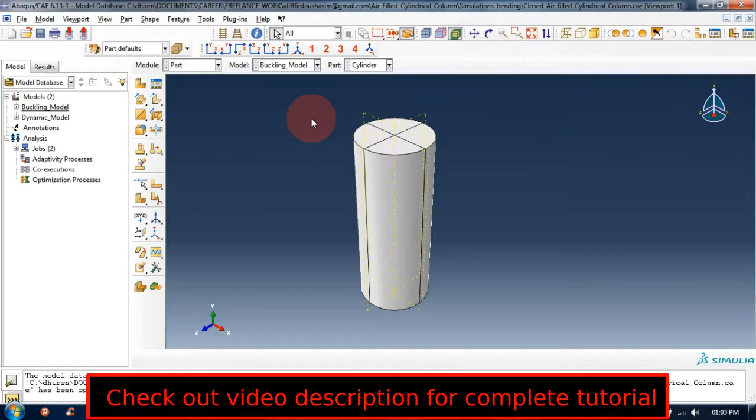In this video, I'm gonna explain how to perform bending of this cylinder, how to simulate the bending of this cylinder. In earlier videos, I have explained how to simulate the compression of this air-filled cylindrical column. In this video, I will be explaining how to bend this cylinder by applying a load parallel to this face, this top plate. Okay, let me demonstrate it very clearly.

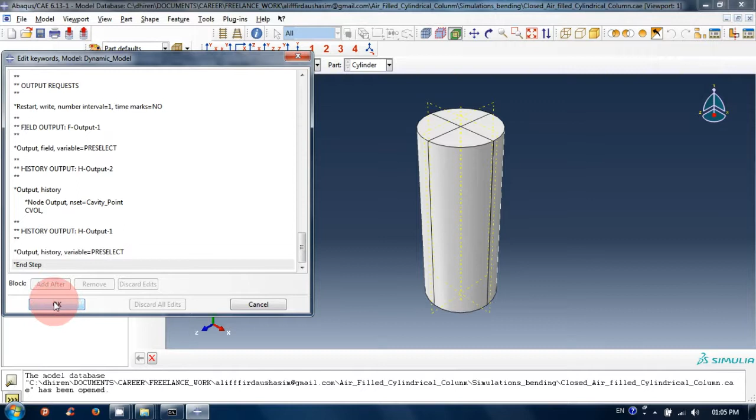Before that, let's clear which are not needed. I don't need this buckling model right now for this purpose. Right click on dynamic model, which I will be editing right now. Right click on that and edit keywords. Okay, click on discard all edits. Click OK. Edit keywords, and things are okay.

Okay, great. So now let's go to load module, create a load, deactivate this, or I can delete this. I don't need it right now. Let's delete that. Click on create and then select the step 1 if not selected already. Then select surface traction. I will be applying surface traction over the top face, so click on that, click on continue.

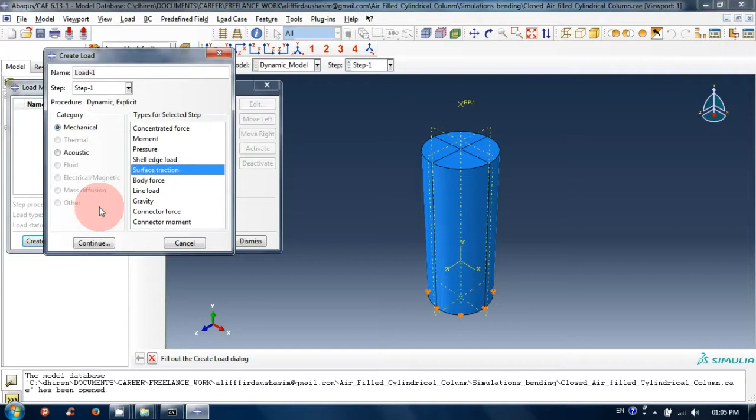Select the surface for the load. So let's select the top surface. I have selected that. Click on done, and then it is asking which side you want, brown or purple. I want the top outer side, so let's select brown. Now I want to apply general traction. Click on vector required.

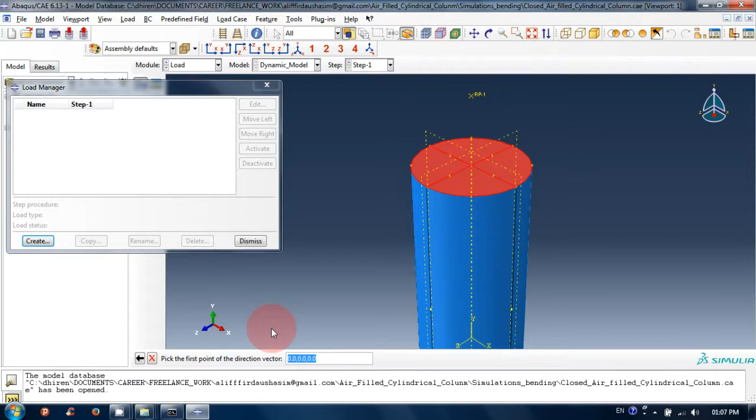It is asking basically the direction of the traction, so I will be applying that traction in the positive z direction. By specifying 2 points on that direction vector, it will clear the direction. This edge is along z direction. The first point I'm selecting this point, and the second point I'm selecting this point. So this is in z direction, 0 0 1, this is positive z direction.

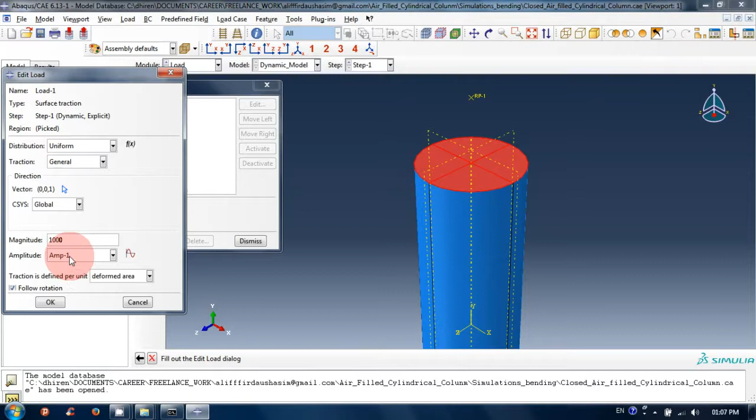Next is the magnitude. Give some magnitude, let's say 1000 Pascal. I'm using SI unit, so 1000 Pascal. I have earlier created amplitude, so this is amplitude. Click on OK. So see, now the direction of the traction is shown on the top face. It is in positive z direction.

Let's check certain things. Go to step manager and click on explicit. This is the step which we have created earlier, dynamic explicit analysis, and here is the amplitude manager which I have just selected in the load. You can edit it. I have given this type of amplitude. This is the time, and this is amplitude.

This is the load which I have given, that means 1000 Pascal. It will be multiplied by these factors. From 0 to 1 it will increase linearly, and then after, if I continue the analysis up to 3 seconds or 2 seconds, it will be constant. So it is up to your choice. Okay, so click on OK.

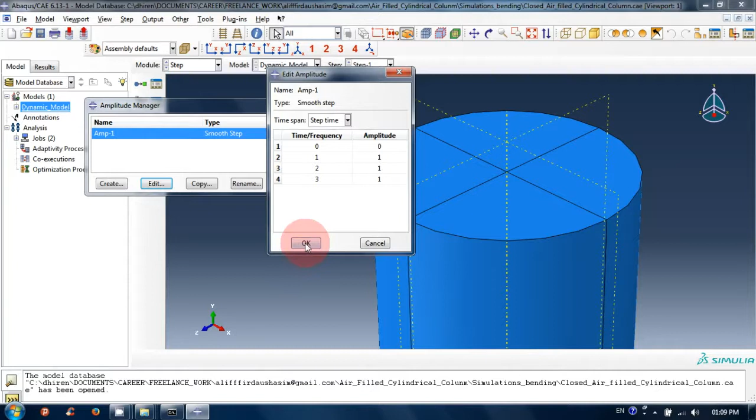Let's check interaction, which I have created earlier for fluid cavity. Okay, it's okay. Again, let's check in the load module predefined fields. I have created, I think, pressure. Yeah, it is fluid cavity pressure. Good. Let's give some temperature also.

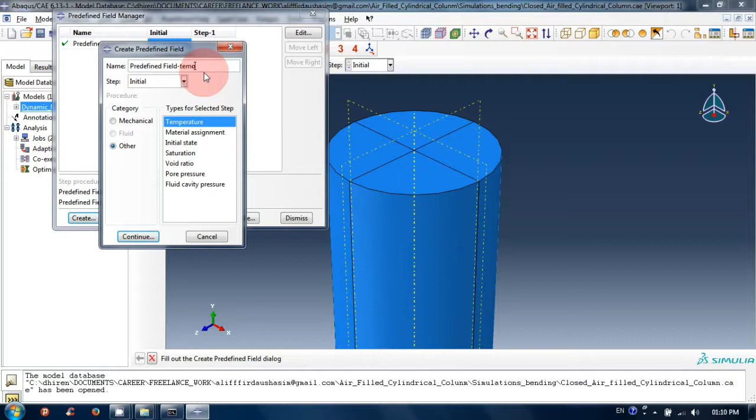Let's click on create, others, temperature, name it temp, so you can recognize what is what. Temperature. Select a region for the field. I have defined the fluid cavity using this point, so click on done.

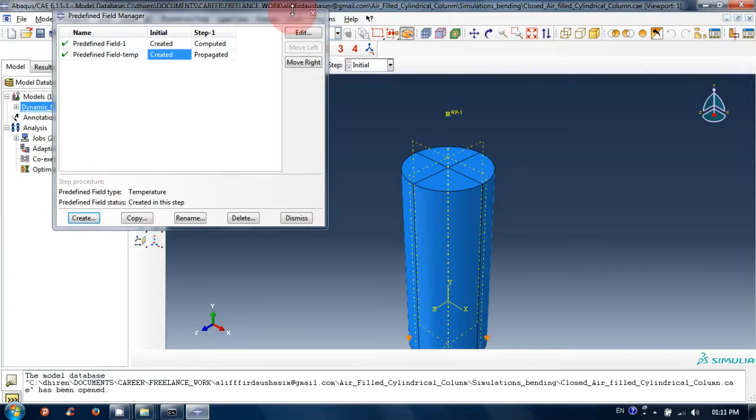Magnitude in SI units, temperature magnitude. I am giving 300 Kelvin, so basically it is somewhere around room temperature. I think now we are ready to go to job module. This is not needed, so please delete it and let's submit it. Let's wait for results.